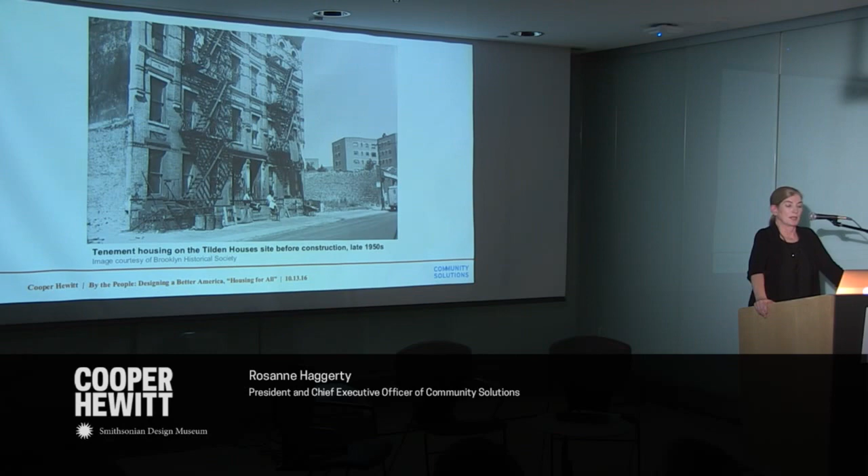At the time, the tenements were judged to be slums and substandard. But when they were replaced, you can see in this slide how it separated the blocks that my colleague Greg and his friends and family lived on, replacing those intimate blocks with super blocks, and de-densifying the neighborhood pretty profoundly. Not only did people get displaced and family groups disrupted, and those informal ties that lead to work and social support broken, but one of the things that happened when these blocks were changed into these seemingly pristine super blocks is all the small businesses were displaced too, and with them the jobs. Older residents of Brownsville will talk about how through the 1950s it was still the village, and then as each of these big public housing projects was built, more of the fabric was just torn up and dispersed.

Our idea, as we set out to rethink public housing in a way that appreciates it as the reality that's there, is that there's no going back to the tenements, but how do we think about public housing given that there's so much of it in Brownsville, and it's been somewhere between poorly maintained and okay enough. New York City, unlike other cities, has never had to demolish its public housing because of abandonment or poor quality to that degree. But neither are these units, as residents will tell you, in sufficient condition. There's a multi-billion-dollar backlog in maintenance repairs for NYCHA housing across the city.

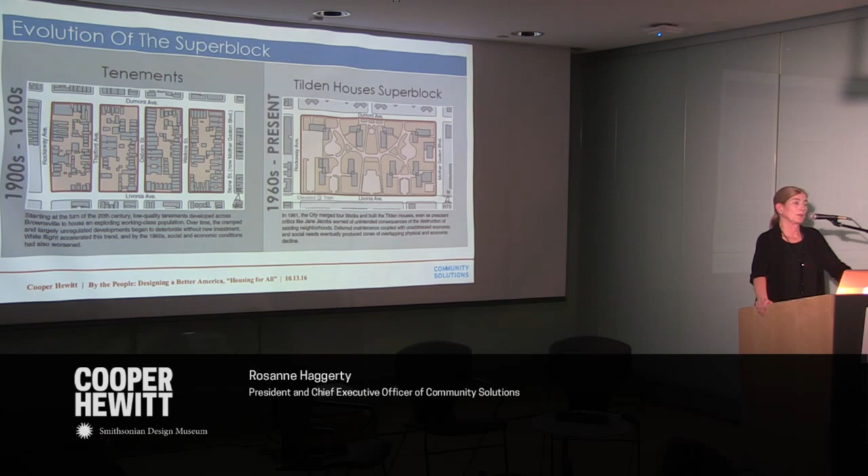So what we started with, looking for ideas around rethinking public housing, we started with the superblock itself and with a source of ideas that has really been a guidepost in our work in Brownsville, which is Death and Life of Great American Cities, and the chapter Jane Jacobs wrote on salvaging the projects. We think that blueprint is actually a pretty meaningful one to test. Essentially, Jacobs said that it was the disruption of those old street grids that presented one of the very problematic and enduring challenges to a healthy community flourishing in public housing.

So an idea that we've organized around, going to meet with residents of the neighborhood, was taken from Jacobs: reweaving those public housing developments back into the neighborhood street grid, with a series of laneways, following the principle of no displacement and no demolition. Jacobs not only said the key is reweaving the blocks back into the surrounding street grid, but also concentrating on the common spaces and connective spaces. She wrote about elevators and making them safe, and making the public areas, the stairwells, the lobbies, the surrounding plazas in public housing bring more supervision and natural flow and natural supervision, not just policing, but community oversight to those spaces.

Those themes being in the background, a principle we really appreciated in her work is that there's a lot of sunk cost here, so let's make the best of it. In fact, New York City looked at what it would cost to replace public housing, and it's really prohibitive. So I think we need a solution that's around making these buildings work. And so we set off from there.

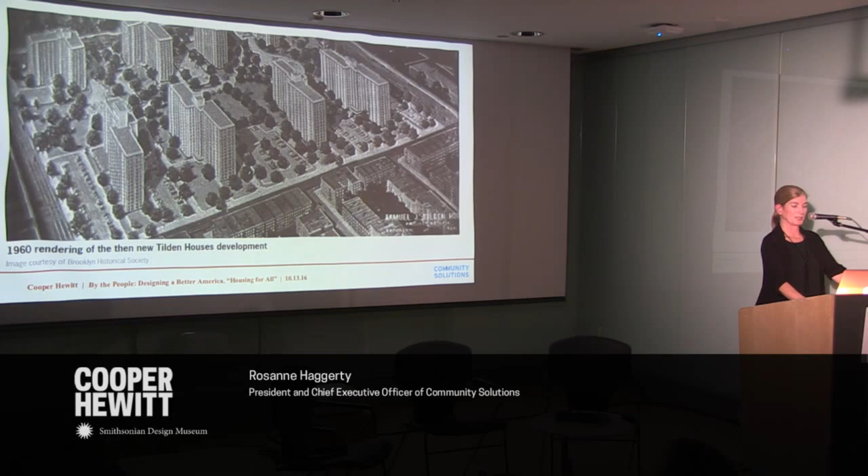Interestingly, when we started meeting with residents, we would hear stories and found pictures to match of older residents talking about how when the public housing buildings opened, the open spaces were well tended, kind of like Jane Jacobs' point: if people are using public spaces and feel safe and welcome in them, the feel of the place is different. In fact, there used to be garden clubs and ways residents could use the property surrounding their buildings. If you visit them now, they're all fenced off and people have no access to that open space. There were common rooms built into the buildings, which over time were shut down, closed off, and became supervision problems.

Common spaces were taken over by the police, were taken over by gangs. Common laundromats were considered too hard to maintain by the housing authority, so they were shut down. You basically have had this erosion of common space or ways for people to participate in the oversight of their neighborhood.

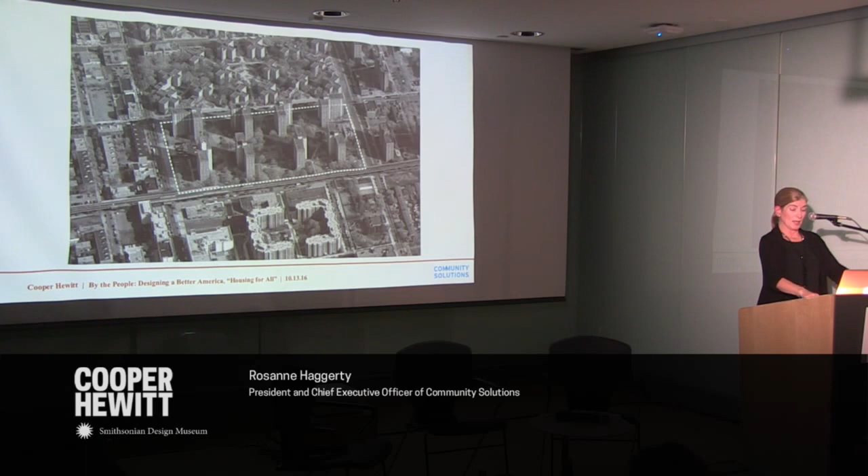This gives you a general perspective on the neighborhood. We're focusing, and have focused in this project, on Tilden Houses, surrounded by the dots here, but it's adjacent to Brownsville Houses, Van Dyke Houses, Langston Hughes Houses, Seth Low Houses, and Howard Houses, altogether 6,000 units in just about 8 superblocks, with probably about 20 to 25,000 people.

So here's the existing reality. This is a particular building we focused on to do the thought experiment and process what a different single building could look like, in addition to what a reimagined superblock could look like. 265 Livonia Avenue is right as you get to Brownsville and get off the number 3 train. It was built as part of the Tilden developments, which is 998 units, opened in 1961, with 8 towers.

I think the picture speaks for itself. No attended lobby, unwelcoming stairwells, and the elevator broken a lot of the time.

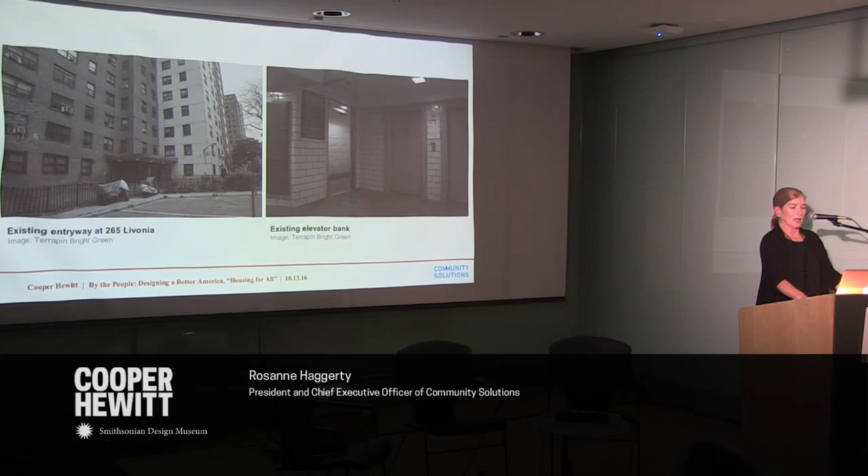With this building being our icon for 'look what could be possible, they figured it out in Europe,' we convened a series of focus groups and undertook a big survey project with Tilden residents.

What was really exciting about this user-informed design process was it wasn't just my colleagues and me sitting down talking to residents about what they liked about their existing housing and what needed to be improved. We got technical experts in the room with them, our colleagues from Terrapin Bright Green and Atelier Ten, to help think through what people were saying and what could be possible from a technical standpoint.

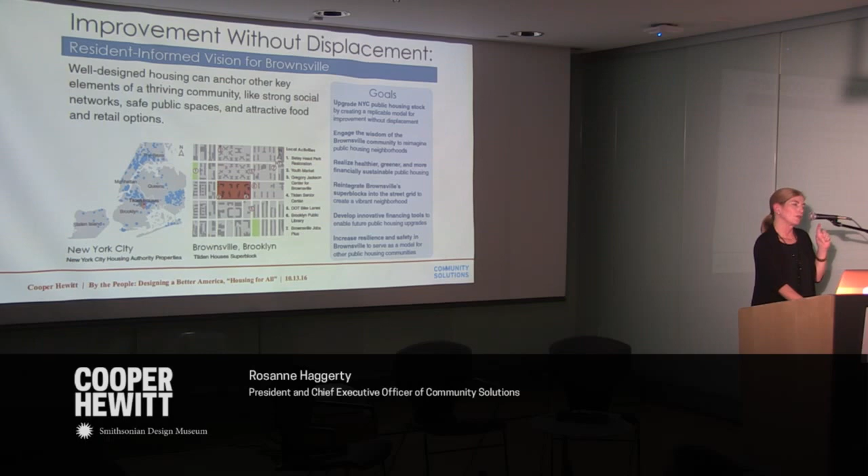The value that we surrounded the whole conversation with was no displacement, no demolition. What can we do, and what would need to happen, to actually set the stage for building a healthier, more integrated, more sustainable community?

One of the things that's always a challenge when you talk to anyone about public housing in New York, and I'm sure this is true in other cities, is how do you do the necessary improvements, which are so extensive now, and deal with the relocation issues. That's been a big political barrier more than anything else to bringing a new lens to this.

Well, the Tilden residents helped figure this out, which is basically: never take an entire tower offline, but do one wing at a time, and begin building infill housing along those laneways to define a new street grid and a more connected block system. Build new infill housing that could be swing space for the retrofit work being undertaken.

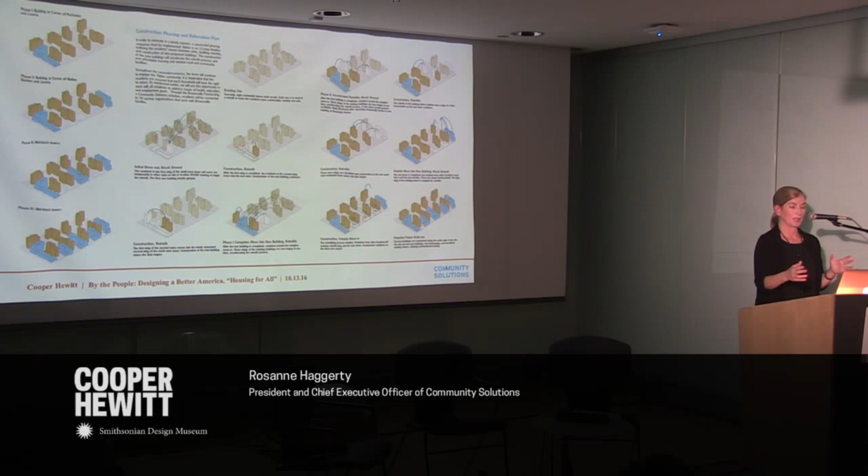So it was important also to think about that there was a way to delve into this that was plausible and actionable.

I think it was important that we started with, what do you like about your housing? Because people tend not to hear good things about public housing, but in fact residents like a lot of what their units have to offer. Within their units, they were very pleased with the space and the unit configuration, and they valued their community and their neighbors.

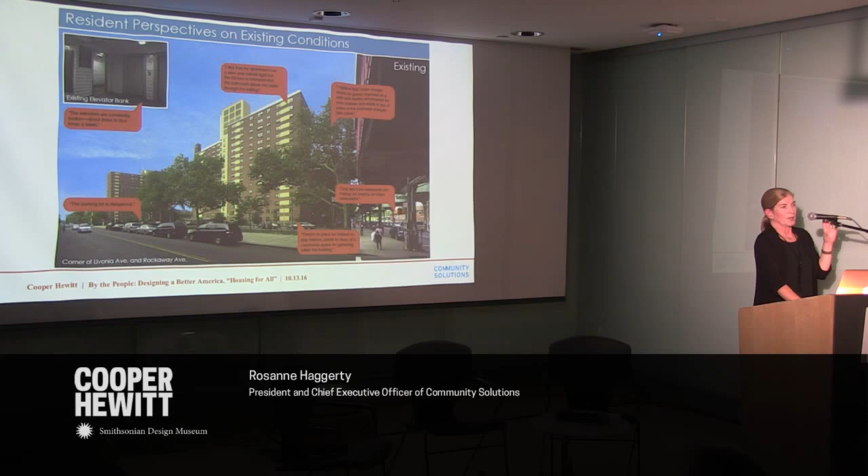The issues that they were raising really were much more about the public spaces: about elevators, about sound attenuation, about air quality throughout the building, about shared systems that were failing, plumbing and HVAC, about the condition of the lobbies, about there being no common space where their children could play on rainy days, or where tenants could convene, as one tenant said, 'when there isn't an emergency, just to be neighbors.'

And so with these insights from residents around infill buildings that could both diversify and increase affordable housing options in the neighborhood and serve temporarily as swing space as buildings were retrofit, and realizing that the kind of work that tenants really valued was not really out of range of a redesign plan that could be affordable.

We went to work on some sketches around what new buildings and new development sites could look like, looking at existing zoning. There's a substantial amount of unbuilt FAR surrounding these public housing blocks, as you saw from the de-densification that took place when the tenements were removed.

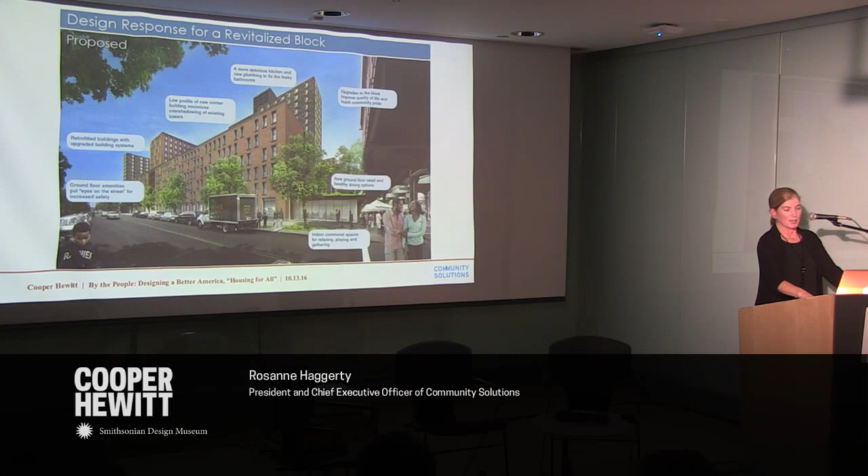The sketches and technical renderings we developed through this conversation with residents were really about how you reclad and expand public housing entrances, shared spaces and lobbies, and how you enable commercial and community space to be built along the major thoroughfares—ways that are consistent with everything we know about good planning, which residents really supported.

The apartment interiors—interestingly, the kinds of changes required by code that tenants really pointed to as important have to do with more insulation, better air quality, and upgraded bathrooms, because of constant plumbing and heating worries.

Better security, both front door and all of the common areas. More durable finishes—again, all things that are very basic and frankly achievable. We set at the end a budget of $100,000 per unit, and felt that most of this work could be accomplished for that amount of money.

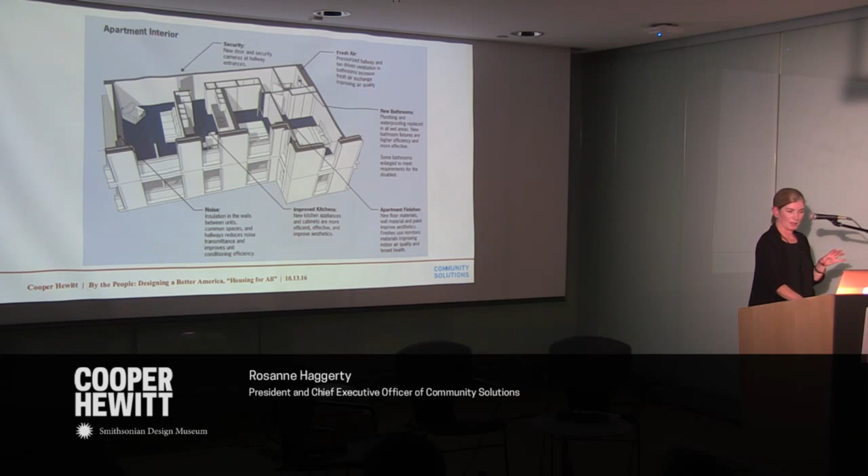And then in terms of the exterior spaces, the building skin upgrade became a really key signature part of how to make this all work from a technical, energy, and financial perspective.

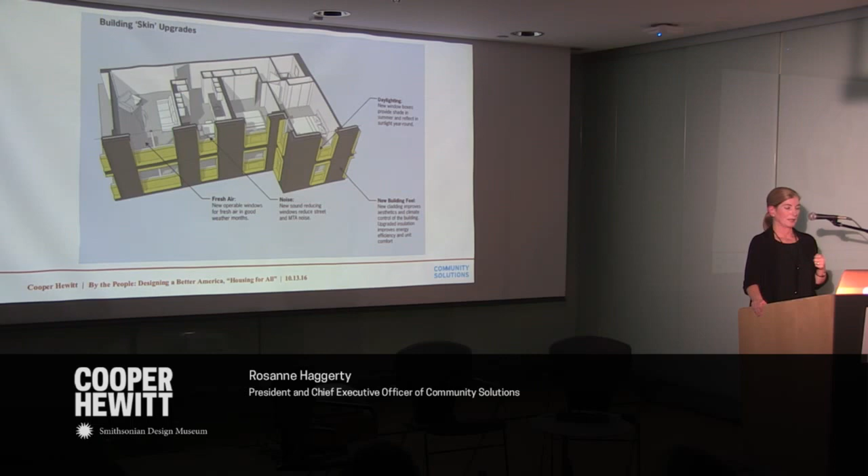The Paris Tower, the developers will tell you, saved about 60% in energy utilization in its first year after completion. The savings from a reclad building—making it more weather-tight and efficient, improving air quality through new building systems, and simple things like more insulation between units—are critical to how the building can be financed through energy savings, and to what tenants required in terms of quality of life issues that matter to them.

So where we are now is we got to a point with this terrific team of residents, technical experts, and financial experts where we believe there's certainly a feasible project here. In the prototype phase, it would involve retrofitting 265 Livonia Avenue—this building on the lower left in brown—and creating a new companion infill building that could serve initially as swing space relocation housing while each of those Tilden towers was retrofit.

There's room on the site for a total of 700 new affordable units at different income levels, which could also include ground floor retail and community space, and better quality open space if you take away those fences and make really usable open space. So there's an awful lot to be gained for residents, for the city, and certainly for the neighborhood, if we could pursue this.

But because of the magnitude of the implications of really getting started with one development, we've realized that while we have a good handle on the technical and financial feasibility, the next task is the political feasibility. The step beyond this is meeting with residents of all of those public housing developments to think about how this basic idea could be extended, and to involve more residents of public housing in the conversation of reimagining and recreating public housing in Brownsville.

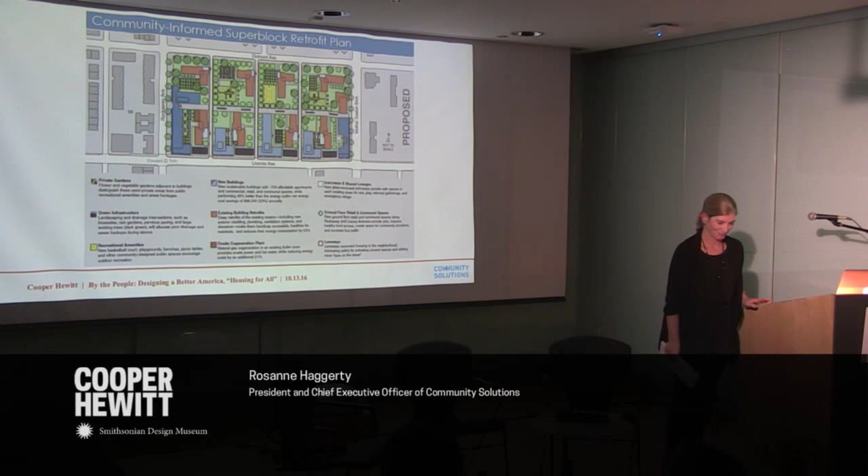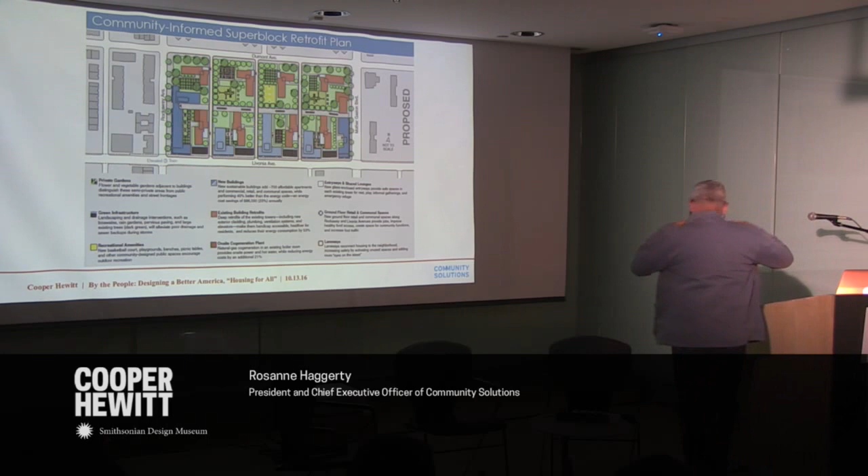Hi, I'm David Baker of David Baker Architects. Can you hear me okay? Yeah, hi.

Our practice is architecture and urban design, and we've done over 6,000 affordable units throughout the United States, the Bay Area, and beyond.

Our mission is to go beyond buildings to create community, which is hard for architects—we're always thinking of the baseboards and all that great aesthetic stuff we love. But that's what we try to do.

So how do you do that? How do you take a building's design and make community? And how do you foster a community? You don't make it—you foster it, you encourage it.

So what we've done, over all this work, is come up with some ideas, some concepts, and we're featuring 9 of them. We're calling it the 9 ways to build community in affordable housing, and I'd like to share them with you as takeaways.

We start out when we design something by thinking about these, and we try to work them in and remind ourselves—I don't think we've ever had a project where all these ideas get in, but the more you can get in, the better it is. So the first one is this concept of reweaving the urban fabric.

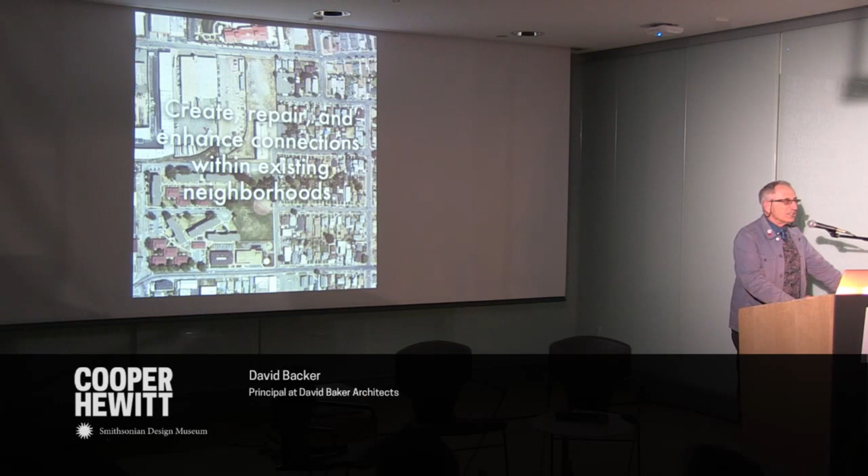I'm just going to show you a public housing project that we did. It was a rebuild—NYCHA has so many units, so much housing authority housing in New York, that you don't have that option. In California we do, so it's an advantage.

This is the existing project. You can see it was built as military housing. Tassafaronga is named after a naval battle that the United States lost in the Pacific. I think there were great dreams of these houses sitting in a garden, but they put these barracks in a parking lot and then fenced it. It wasn't clear—maybe the fences were to keep the bad people outside from getting in, or to keep the bad people inside. It's not really clear. In any case, it wasn't successful.

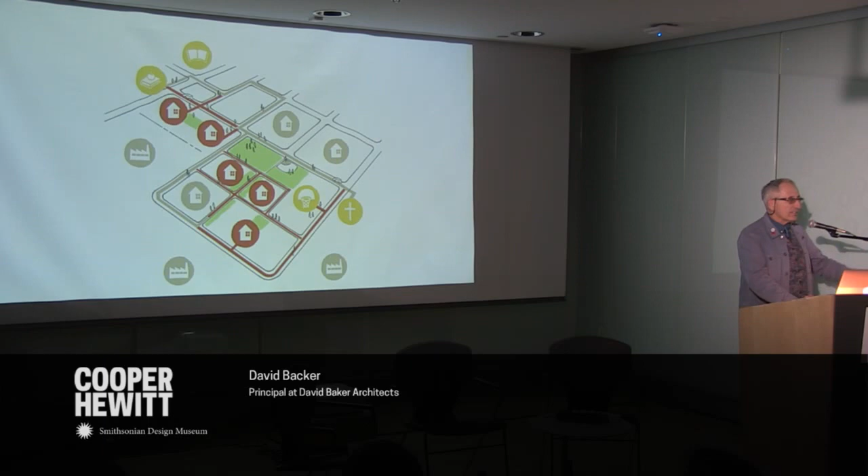So what we did is take this about 7.5 acre site, and there were all kinds of really nice features that already existed—a school, a library, a community center, a park—and we reintegrated them and also opened up the grid again so you could get through. There was a situation where you had to jump a fence and run past guard dogs, then climb another fence just to get to school. Not ideal.

One thing is, streets are good things. So this is the interface between the neighborhood and the new housing, and we put residential entries on the ground level.

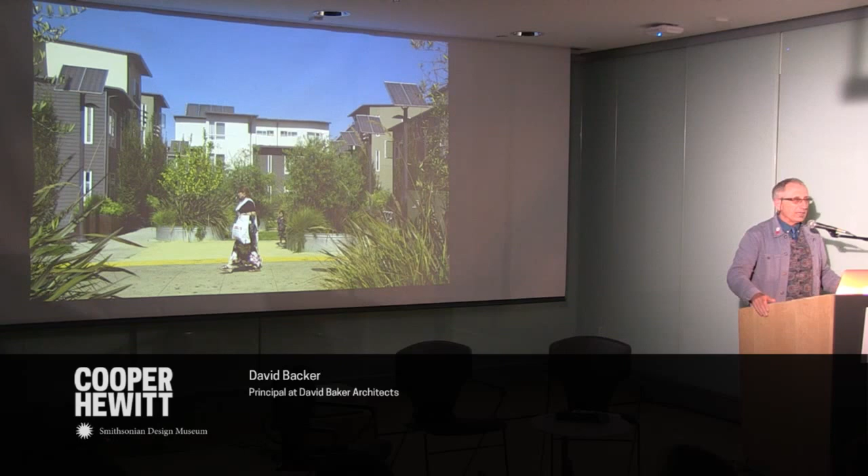In the interior of the block, this woman was actually walking in the street—she's walking on a speed table. It was interesting because we did all this traffic calming, but Google Maps was sending 65-foot trailer trucks through the site, and they couldn't get through. I was there once when a truck couldn't make the corner, and they had a clipboard where they had the truck driver fill in his insurance information because he'd run over some stormwater swale in the process. But anyway, they changed Google Maps, and now people drive much more slowly.

It's really interesting—out in the neighborhood on the street they drive really fast, and then as they enter they start going slower, and people feel comfortable in the streets.

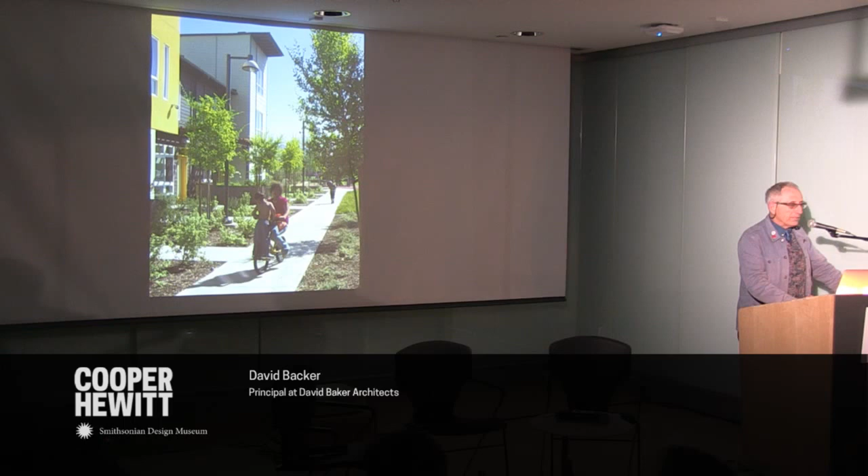We also replaced streets with pedestrian paths. The important thing is that the grid is the great thing—not every place has grids, and you don't have to do a grid, but in the United States we're very attached to them since that's how our cities are laid out. But it doesn't have to be for motor-driven vehicles. This is a pedestrian street with kids riding their bicycles down it, but it's still consistent.

Interestingly, the management folks—the people who manage the building—California has gone to a private-public model, taking management of housing authority projects out of the government and putting them in the hands of nonprofits. They said, well, we're going to have to build a fence to keep the bad people out. But our allies were actually the housing authority police, who said the fences don't really work. When we're chasing some kid, they climb over the fences—we don't really want to climb over fences, we can't. We'd much rather walk at a reasonable pace and radio the squad car to cut them off.

And there's actually been a 25% reduction in crime.

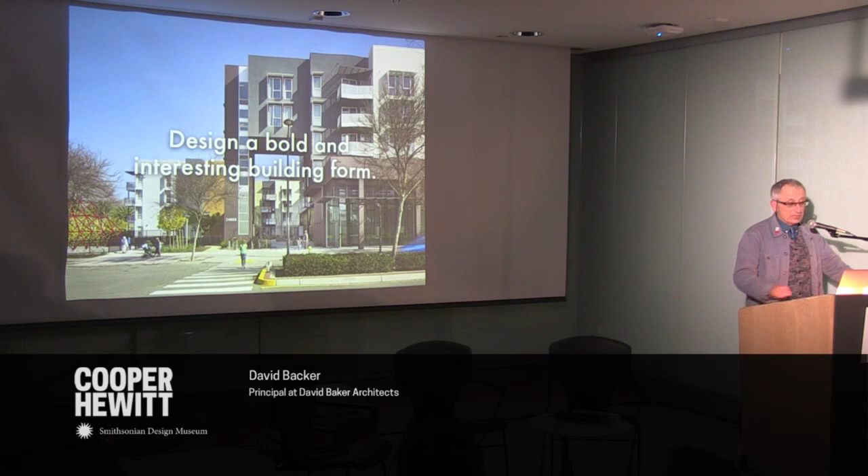But making big moves, so we do some sort of volumetric, signature design, and that allows us to make an interesting building form and use materials that are more straightforward, such as cement plaster or Hardie board. They're one of my favorite materials, a wonderful green, incredibly inexpensive, and very durable.

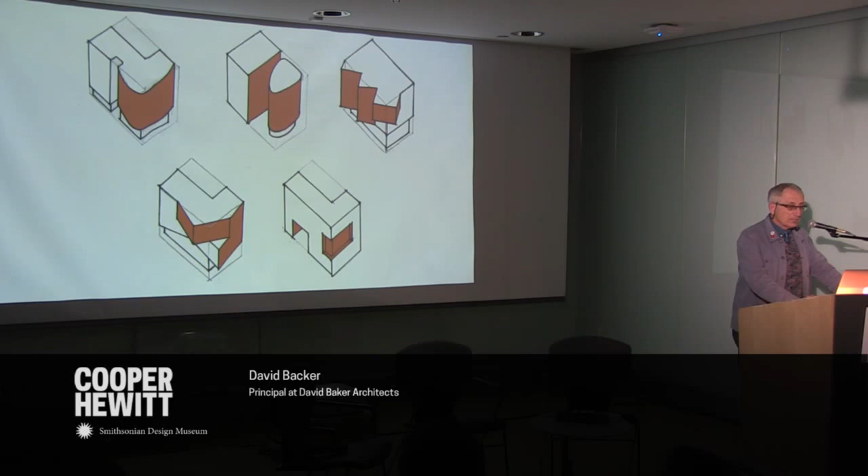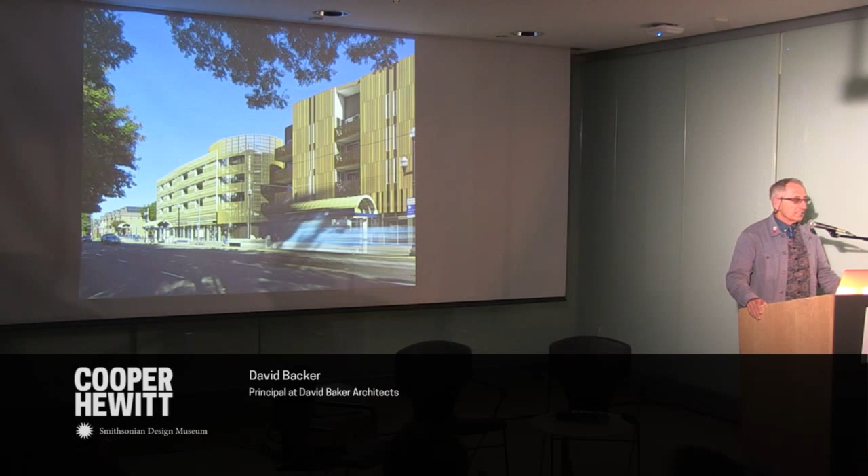So this is an arterial, a very busy arterial, and it's a light rail stop as well. So it has some identity and meaning as you go by it, which I think is super important in cities. This is a design we're just about to start construction on.

Next is 'a little goes a long way.' A lot of times you go through this wonderful process I know the architects will recognize, called value engineering, otherwise known as taking all the good stuff out. But at some point we decided to make a case for leaving some in. So this is 'a little goes a long way.'

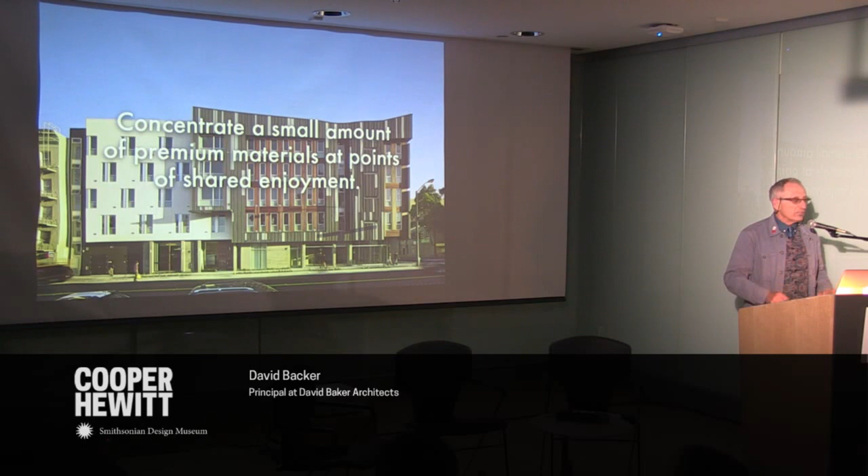The idea is you take a portion of the building, like 20%, and make that 20% really good, and make the other 80% not cheap, but straightforward, using materials that have less cost. Because if you make it all with great or expensive materials, it's like a Viennese torte. You don't want a city made out of Viennese tortes. It's like adding a little spice to a dish. You don't want to add too many hot peppers.

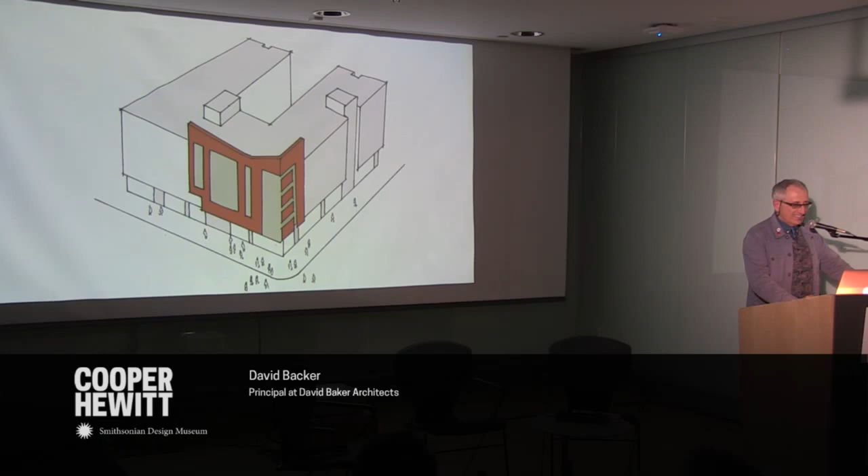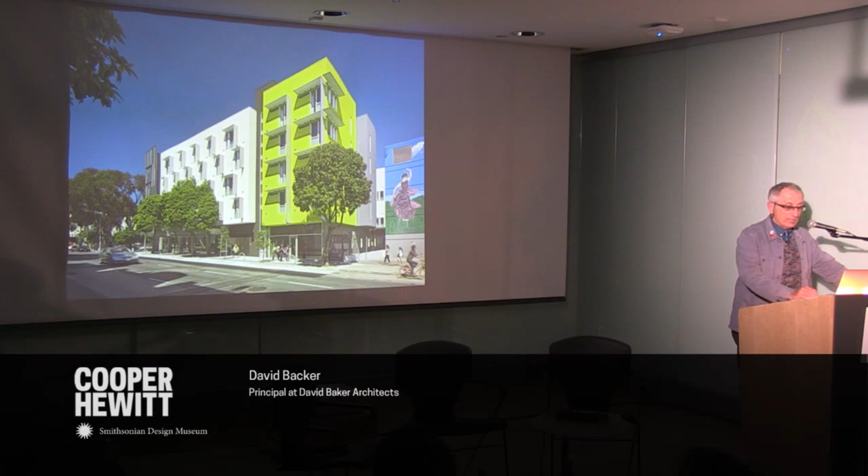So this is that building turning the corner, another idea of adding some percentage of goodness: these sunshades, which we figured out cost about $3,500 a window. But it's on a very inexpensive cement plaster stucco base, and the other great thing is it makes them a win-win, so we don't have air conditioning in this building. They're very small units, and this really helps keep them from overheating, because we have a lot of sun in San Francisco before Karl the Fog hits.

And then across the street, we did a building that's actually very interesting because it's micro units, but this is not affordable housing. It has a component of inclusionary housing, it's 12% affordable, and the rest is unaffordable—affordable to someone.

It's a very similar unit to the formerly homeless housing, which is Richardson, about a 325 square foot unit. The difference is that the cabinets are much nicer.

These are all in the Octavia Boulevard area. These are all former freeway pylons. So you can imagine each one of these buildings where hundreds of people lived was basically a foundation and a post for an elevated freeway.

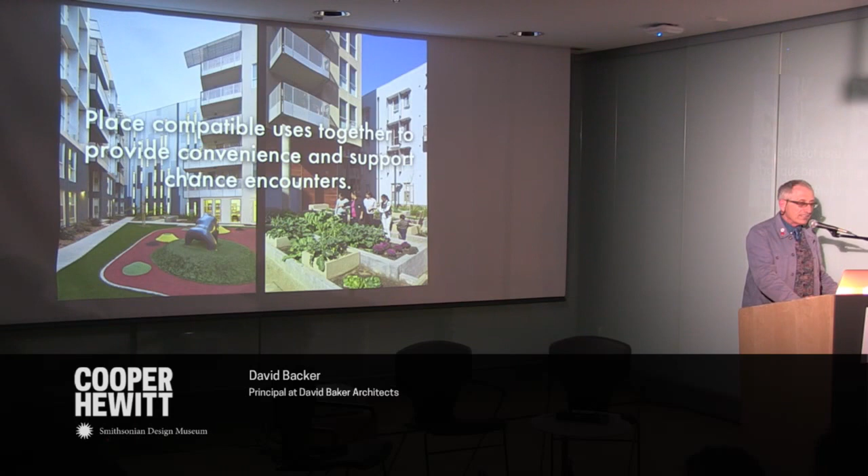So there's actually the tot lot, which consists of these precast gorillas having a food fight, and there's the urban agriculture committee of this affordable family housing, looking at their kale.

So this is another idea, recently copied by Google, where they don't let people work from home because they want them to run into each other and talk. So you put all that stuff in proximity, and people bump into each other and get to know each other. The mailboxes are a really good thing to do that with.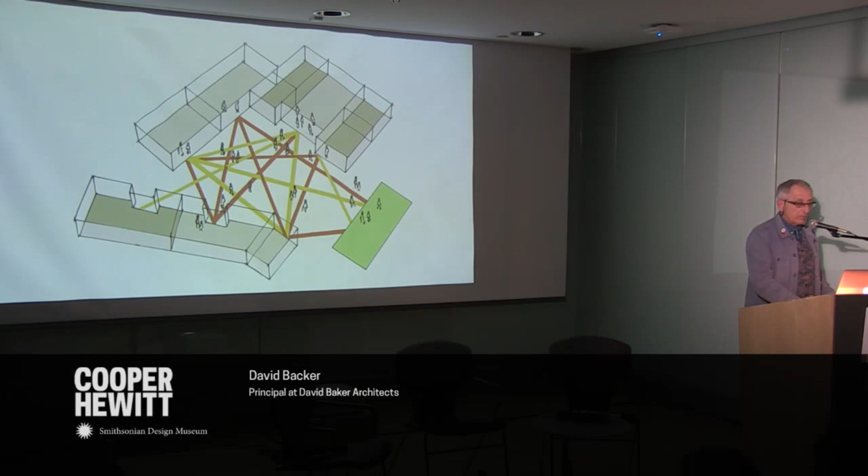And this is looking out on that urban agriculture from the community room. There's a common table there and a barbecue, so you can barbecue your eggplants.

And that's looking down. We put in ornamental plants, but with part of it being urban food-producing, they've gradually pulled that up and actually made some of it the children's play area. That's another thing that's super important.

This is an interior of that building with the Xbox lounge, then the homework computer area and the washing machine laundry, all in proximity, which is great because people can watch their kids and help them with their homework.

And light and circulation just means that you bring light and air into your circulation. In California we have the advantage of not needing a window because we have winter, but it's not like your winter. I grew up in Michigan, so I know about winter.

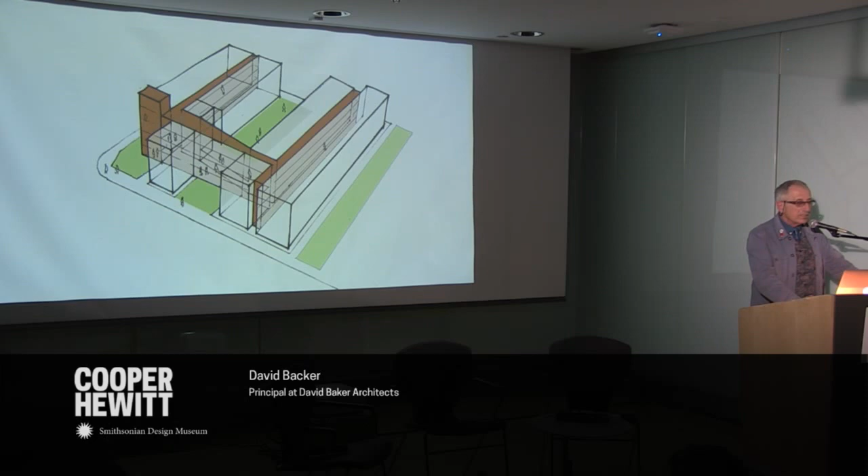So this is a diagram of a building we did with open air corridors. This shows what we call green stairs, which makes a really great front door icon illuminated at night. But you see, this is what it looks like during the day, in this affordable family housing in West Sacramento.

This is in a complete new district in a floodplain that they raised up about 9 foot. It's a very interesting project. And then that stair leads up to this open air circulation.

This is bridges connecting the two sides of the building. And then kind of all these things work together.

This is proximity. This is our tot lot, required tot lot, and this is a climbing wall for kids. That orange stuff is actually soft-fall surface. Well, there's no soft-fall surface here because this isn't an official tot lot, so we didn't have to follow the code. Kids actually don't fall on concrete, dangerous things, and they're more fun.

So that kid is, yeah.

And we're doing this now in Charleston. I don't know if you know about the Charleston single house, but they used to circulate completely on the exterior of houses in Charleston, only in Charleston, not even in Savannah. They call them single houses because the corridors run only on one side.

This is affordable senior housing. So we got our circulation in this 12-foot corridor, but it's actually a porch. The idea is that seniors hang out there.

They're interested. They look at other people. They can look down at the garden, and they can get cross ventilation through these kind of shotgun one-bedrooms that we designed. It was really great working in Charleston because they're self-funded.

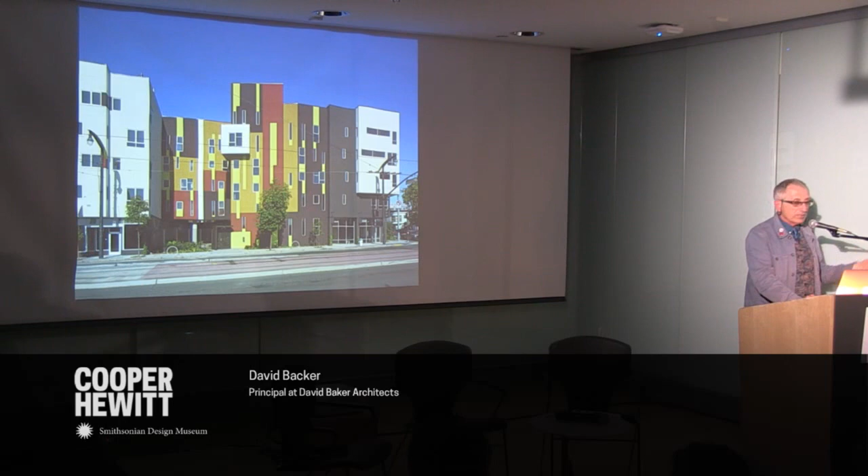This is a cultural one where you have African mudcloth, again just to bring the community into it. There's an African-American community. Apartments are really boring because you have to have the windows in the same spot, all above each other. So the circulation that's exposed here, and the entry into that courtyard, it's all bright and nice.

This is formerly homeless seniors. They're doing an art class, which is good, and then we provide a place for them to display their art afterwards in these vitrines in the lobby, which is really nice. And then art for all, last one. So art is a good thing.

It's great in many ways, core to the human experience, and it's really hard to get into affordable housing because there's no budget for it. But it can provide really great things like wayfinding.

This is creative growth, developmentally disabled artists who are fantastic, and then you can see they're digitally licensed. These are floor lobbies in these buildings, so as you go up, it gives you a certain character when you get off the elevator. You can see your painting.

We borrowed from public art on a public parking garage, and on the right you can see window fritting. That's a blow-up of one part of it because that's a mosaic mural, and that's from the inside. Particularly after I tell you that it's true, you can see that it's a mosaic, but it was a way of bringing it in and forming it.

Last one, this is a project we did in Union City, and you've seen some slides of this building. We had to do public art, and this wonderful muralist named Mona Caron said, 'I'm going to paint a wildflower.' I said, 'You sure that's a wildflower?' And she said, 'But I'm going to make it really big.'

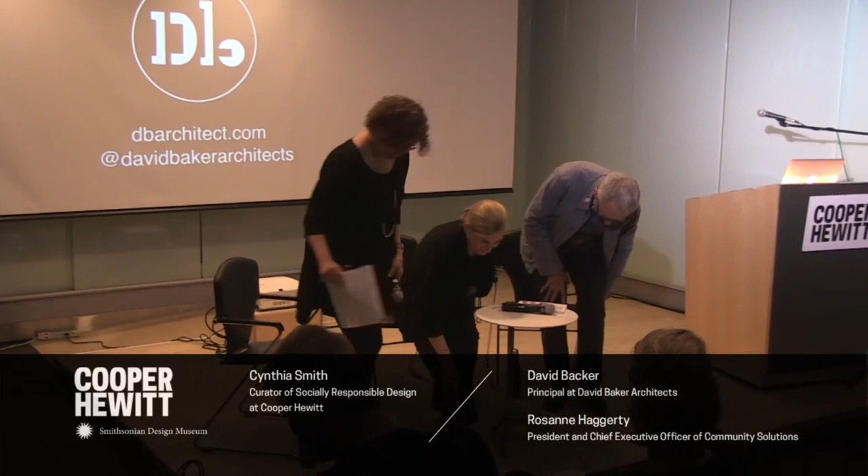That was so incredible to see both of those presentations. Thank you so much. And yeah, to be so moved by the response to the community, just really quite wonderful.

I think this is a really good dialogue about what's possible. What you've been able to realize in this multitude of ways, David, and the hope that this Tilden prototype has, and the dialogue about what's been done in California and how that might be applied here in New York City if we had the political will to do that.

So both of these examples, from my perspective, point to how design, whether it's retrofitting and reweaving a housing authority superblock into the neighborhood, or designing new mixed-use, mixed-income, inclusive housing complexes, can enrich an entire city.